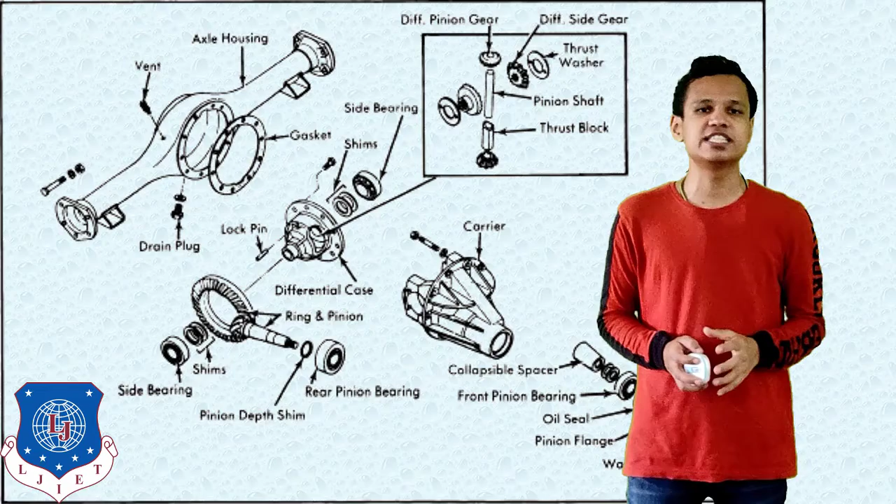Now in this case we will learn about the differential maintenance as well as the rear axle maintenance. So let's start with that. The first thing we need to look at is the exploded view of the rear axle whenever we are using the rear wheel drive with the front engine layout. Now in this figure you can see the rear axle has been dismantled and all the components from it have been kept in a disassembled view.

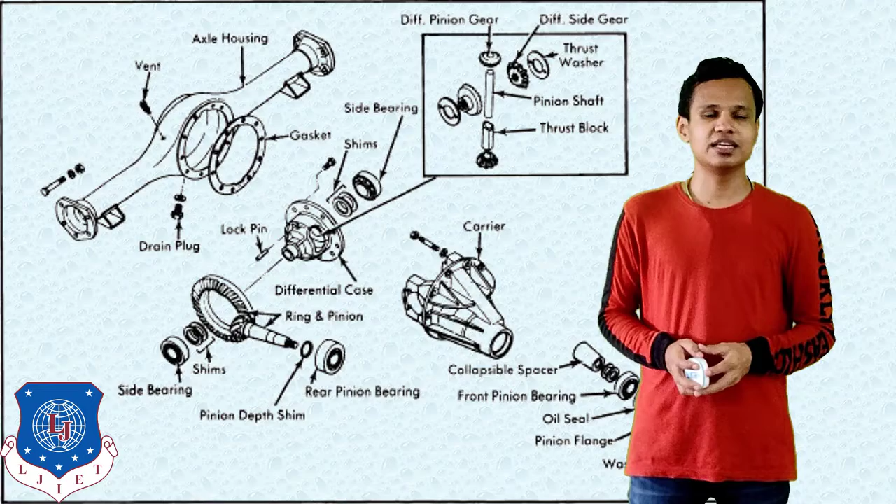You can see the gears of the differential, the 4 gears that are the spider gears of the differential. Also there will be a final drive which consists of the 2 gears. One is the ring gear and second is the pinion gear. The pinion gear transmits the power from the propeller shaft towards the ring gear, and the ring gear further rotates the gears of the differential, and the differential further transmits the power to the wheels and tires of the rear axle. The cover of the rear axle has been kept on differential and axle as well. The axle will be called the live axle in case of this design.

Now let's see some steps of the diagnosis for differential and rear axle. For that, the first thing is that the differential gears on the rear wheel drive will rarely wear out, because the torque transmission and the power on those gears are not as much as the gearbox, so there will be a lesser amount of wear in case of the gears of the differential.

Now damage to the gears can happen because of moisture or dirt if the cover is not properly insulated from the atmosphere, and if the driver is a rough driver or the differential is facing abuse from the driver. It means the driver is driving the vehicle very roughly, then it can also create problems to the gears of the differential as well. Also, sometimes the gear ratio gets changed from the normal position. The gear ratio which we require gets changed in case of the differential. And in that case, we will always have to disassemble the differential gears, and the gear ratio will have to be reset once again.

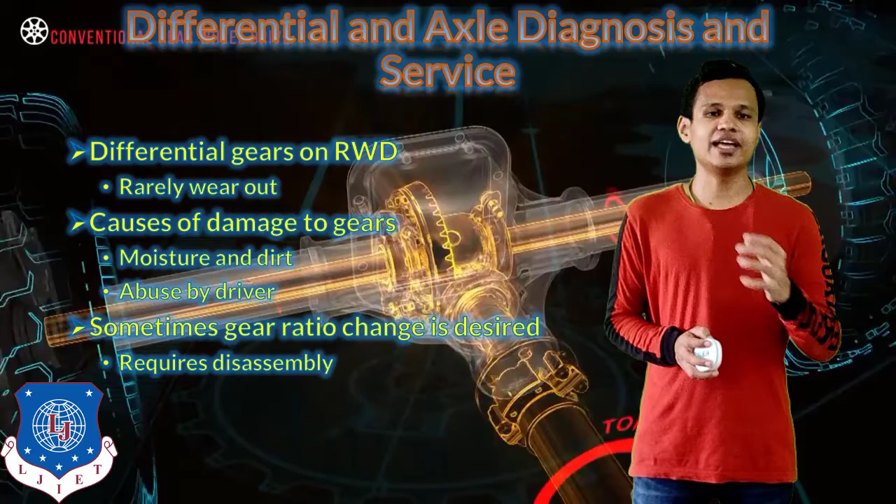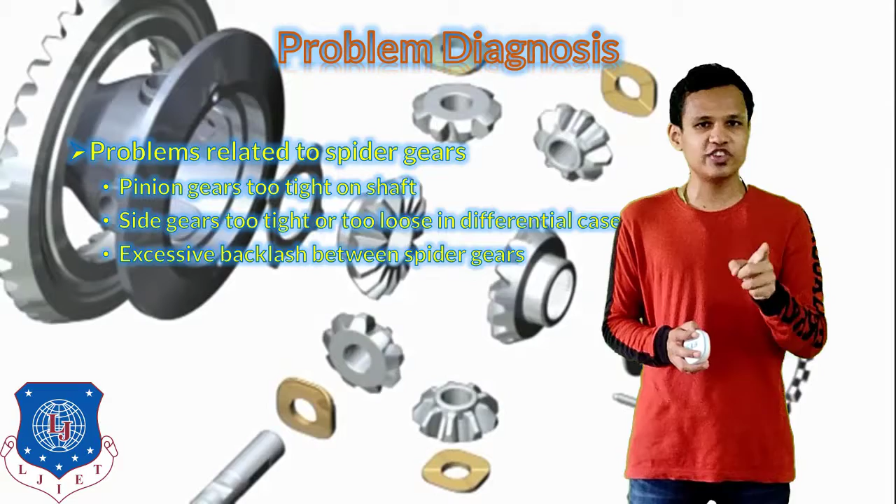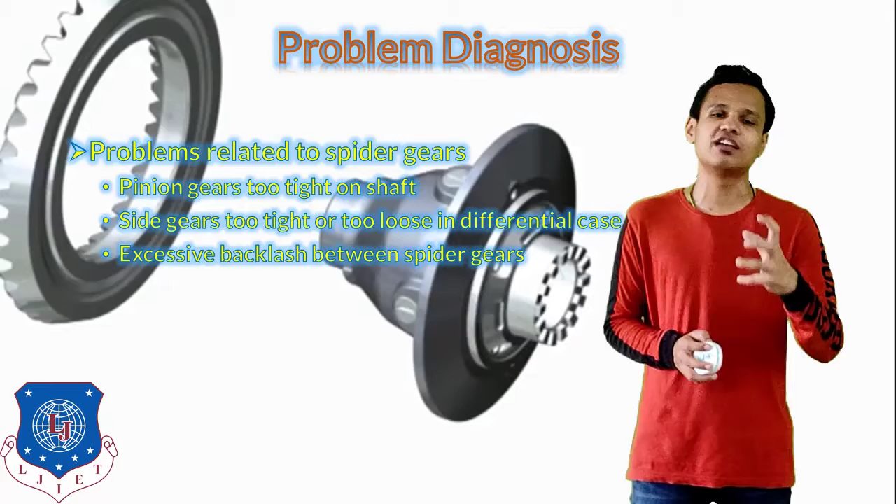Next thing is the diagnosis of the problems in case of the differentials. So problems related to the spider gears. Spider gears are the 4 gears which are given inside the differential. Problems can happen if the pinion gears are too tight on the shaft, or the side gears are too tight or too loose in the differential case, or excessive backlash has been provided between the spider gears. The detail about the backlash will be learned in the next video. We will see how to control the backlash, how to adjust the backlash, and what is the purpose of giving the backlash to the gears of the differential.

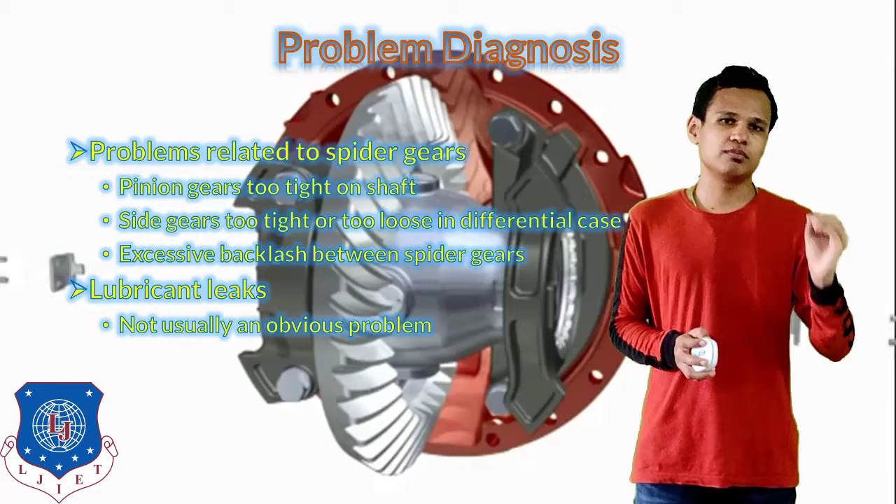And next thing is the lubricant leak. The lubricant will be filled in the differential case inside the rear axle housing, and that is generally not going to be any problem if there is no big leakage in case of the differential lubrication. Next thing is the diagnosis for the axle bearing. The axle bearing is the bearing which is connected at both ends of the axles and which will be further connected to the wheels. If the axle bearing has been damaged, then it can result in the fluid leak or the bearing noise. There is an important consideration to keep in mind whenever we are doing the axle bearing diagnosis.

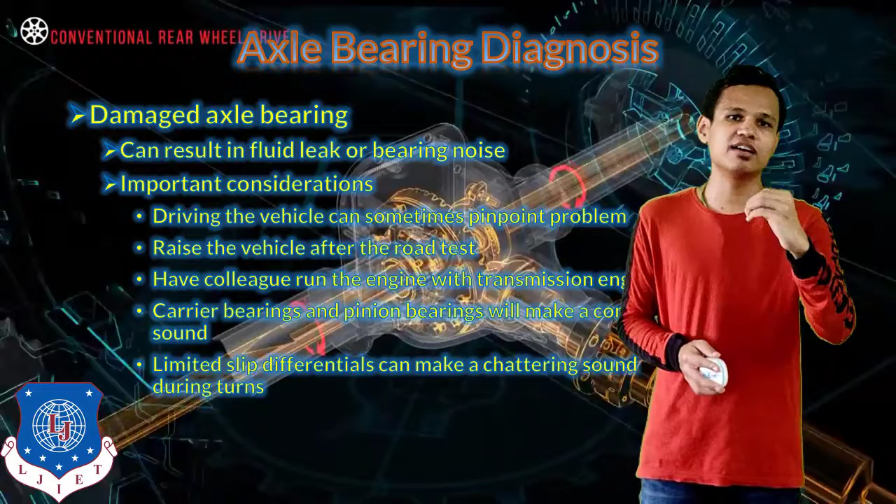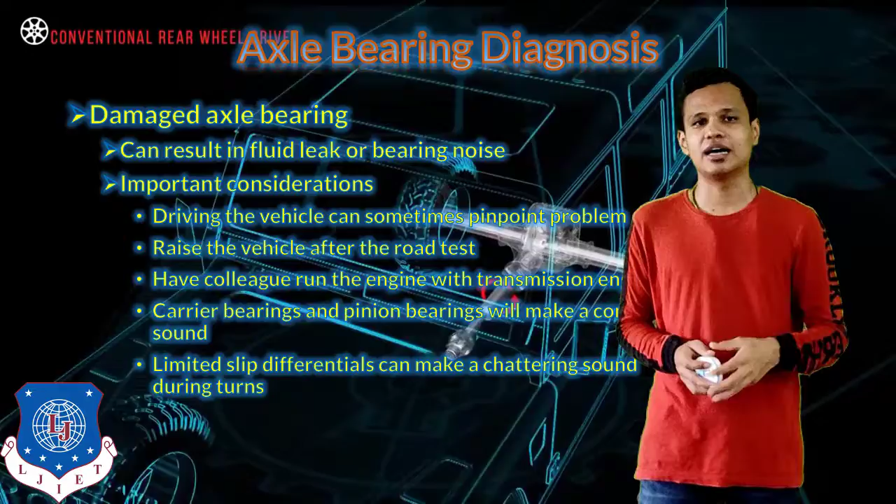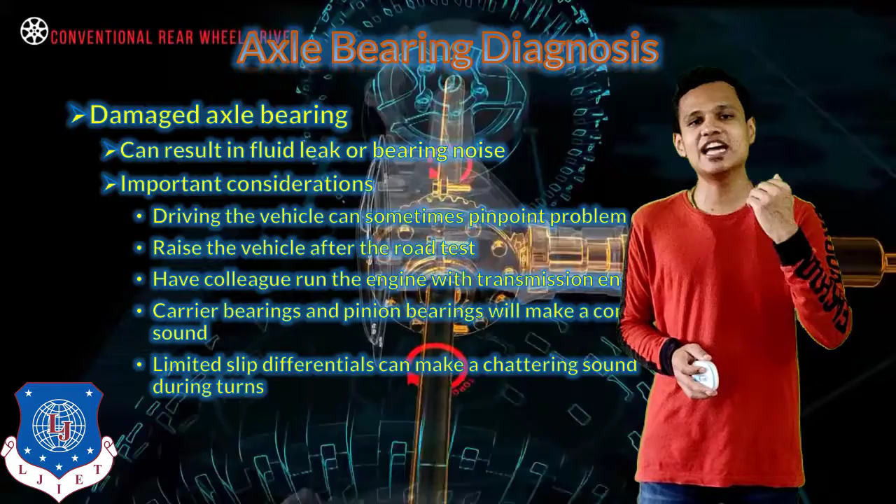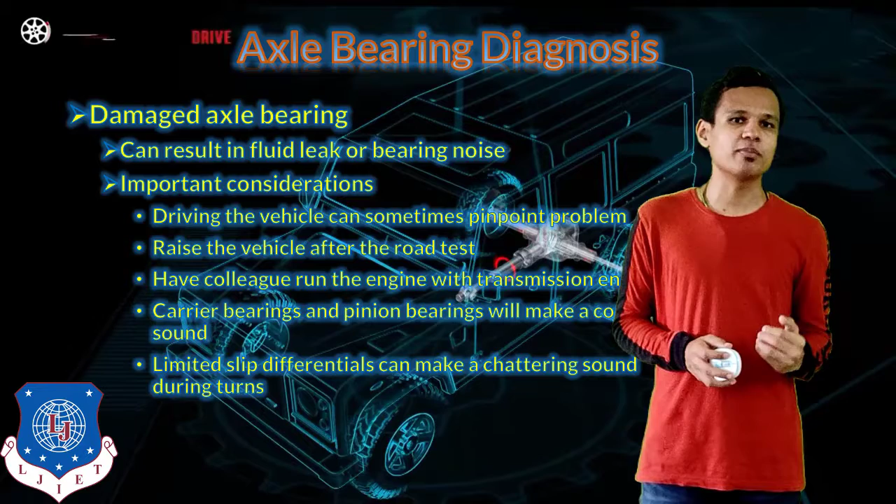We will drive the vehicle, which can give you the problem location or show you how the problem is occurring. We will raise the vehicle after the road test, and we will have a colleague run the engine while we are raising the vehicle. After we engage the transmission, if the carrier bearings and the pinion bearings are damaged, they will make a constant sound. The limited slip differential can make a chattering sound while taking turns. That is normal if we are using the limited slip differential.

The next thing is the axle bearing service. In case of the axle bearing service, the sealed rear axle bearing needs to be removed if there is any problem. There is no service interval. Axle removal is required, and press work is usually done by a parts business or the machine shop.

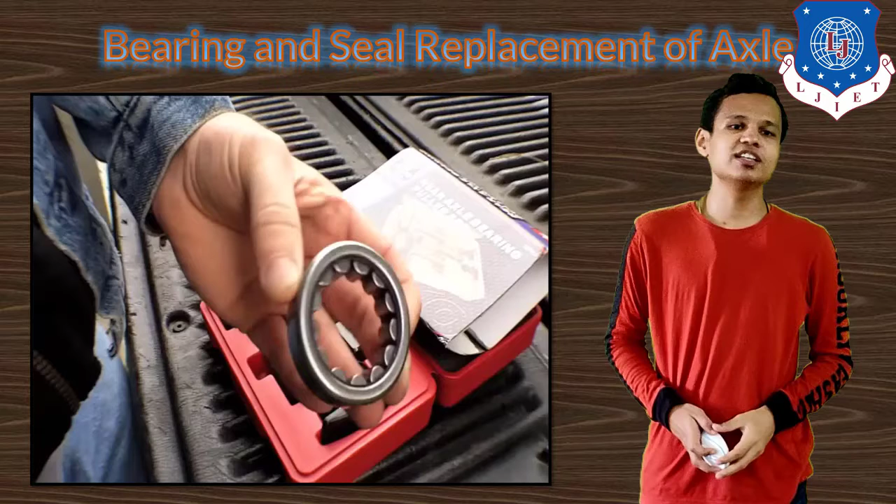Repair: how to repair the axle seal. That requires the removal of the axle from the differential. Only after that can we remove the axle seal. So now we will see the bearing and seal replacement of the axle, how to replace the bearing.

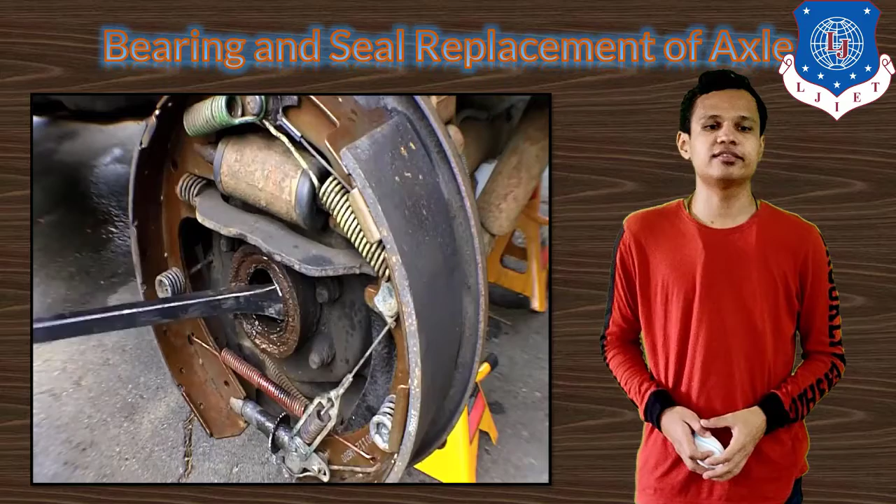So in this video you can see that the roller bearing which is used in the end of the axle will first be removed from inside the axles. To remove the axle, first the seal will be removed. What he is doing is removing the seal from the bearings. After removal, the seal will be kept aside, and after that the bearing can be removed with the help of a special bearing puller.

You can see that it is hard to remove the seal. This has been removed now. Now this type of puller will be required to remove the bearings. It will be inserted in there, then adjusted by opening its flanges, and it will be closed with the help of a nut. After closing, it will be pulled with a little force, one by one.

We will pull the bearing from it. Just by pulling, the bearing will come out with a number of pulls, and this is how the bearing will come out with the help of this special puller. Now we have to put the new bearing in place of the old bearing. We have removed the old bearing. Now we will put the new bearing in place of that old bearing.

So the next thing we need to do is insert the new bearing. This new bearing has been kept on the puller once again, and that puller will be entered inside the hole, and the bearing will be replaced by this simple method. You can see now that the bearing has been inserted, and it will be pushed continuously, same as the pulling. This time we are pushing the bearing inside, not pulling it.

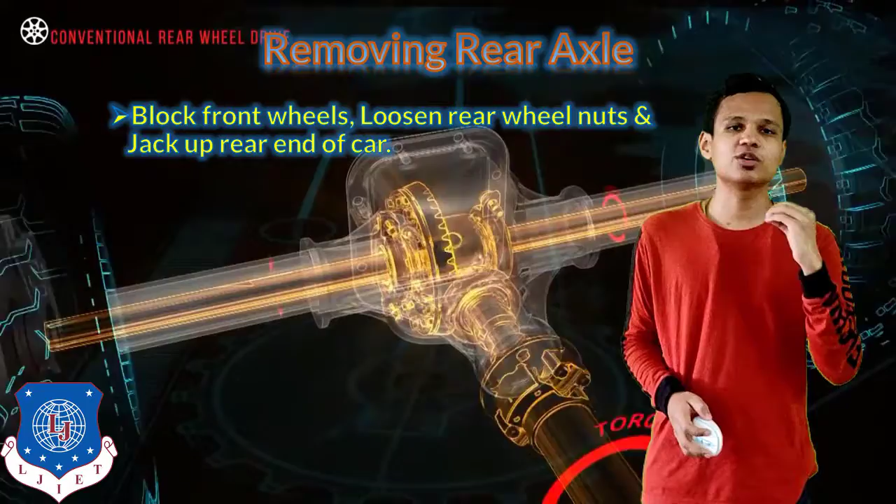Next thing is to remove the rear axle. How to remove the rear axle from the vehicle? For that, first we will block the front wheels, loosen the rear wheel nuts, and jack up the rear end of the car. We will put the screw jack at the rear of the car.

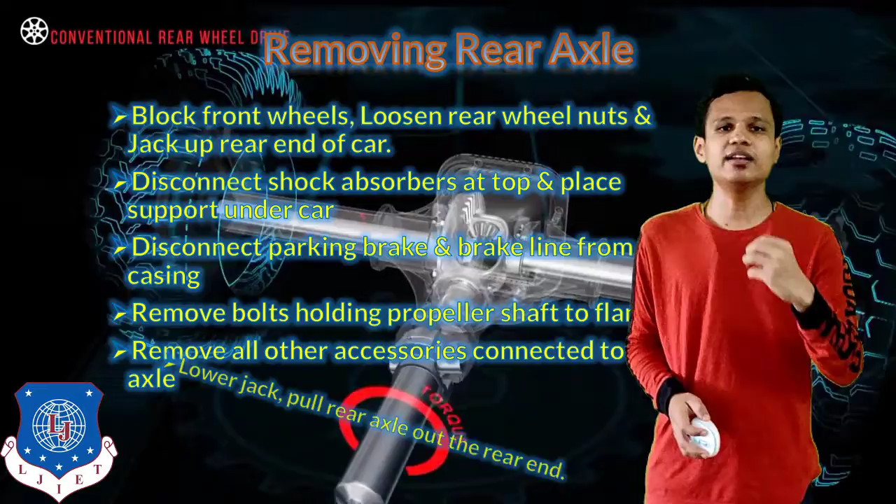After that, we will disconnect the shock absorber at the top and place support under the car. Then we will disconnect the parking brake and brake line from the axle casing, and remove the bolts holding the propeller shaft to the flange. After that, we will remove all the accessories connected to the rear axle, and after lowering the jack, we will pull the axle out of the rear end.

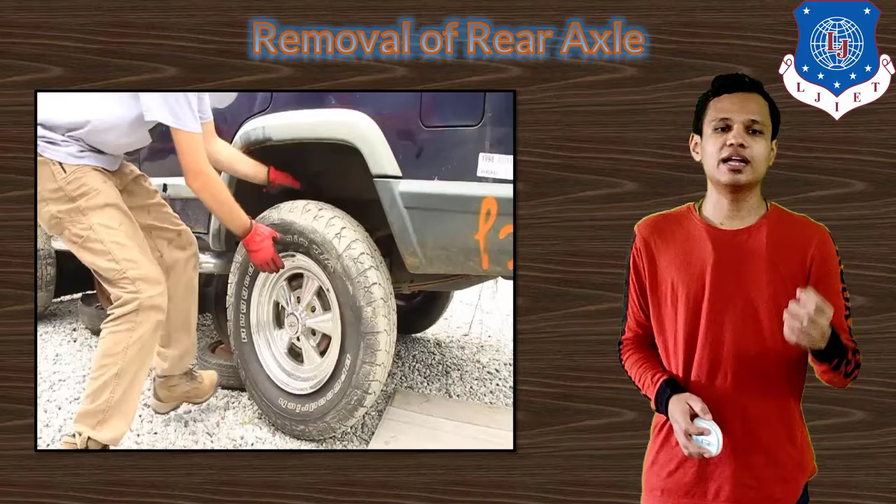So after removing all the components attached to the rear axle, we can easily remove the axle from the casing. This is how fast the wheel will come out, and all the components will be kept aside. The nuts have rusted, so we are applying oil on them so we can easily remove them whenever required.

Now he's removing the shock absorber; the strut of the shock absorber is being removed first. Next thing will be to remove the shock absorber. He is removing the shock absorber which is connected with the rear axle assembly. After that, the propeller shaft will be disconnected.

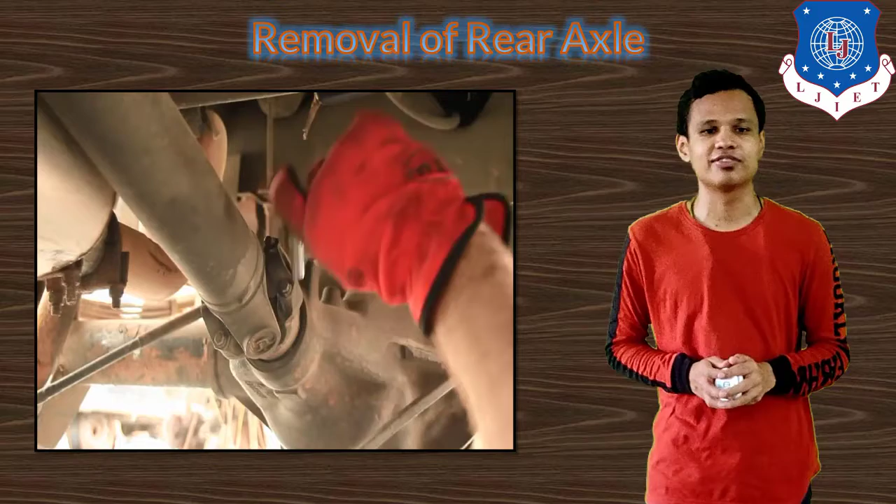Now what he is disconnecting is the propeller shaft, that is, the drive shaft. The flange end of the propeller shaft will be disconnected from the rear axle. Just removing the nut, we will easily remove the propeller shaft from the rear axle.

After removing the propeller shaft from the rear axle, next we need to remove the parking brake. What he is doing now is removing the parking brake lines. He will just cut the brakes and he will provide new brake lines.

Next he will cut the brake lines and provide new brake lines when the installation is done, which is an easier part compared to the whole process of removing the brakes.

Right, now the bolts will be opened, and after opening the bolts, the rear axle can be pulled out from the assembly. Right, so this is how the rear axle has been removed from the system. Next thing will be the removal of the differential from the rear axle housing.

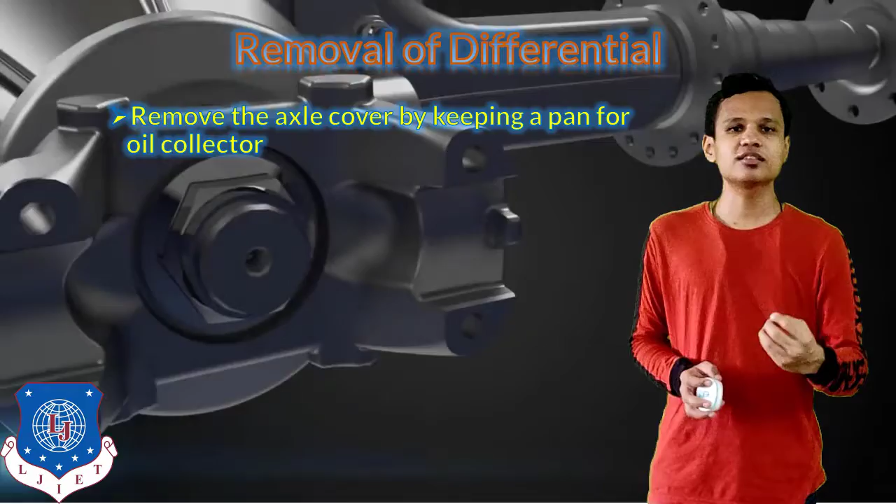Right, what we did is that we removed the rear axle. Now we need to remove the differential from it. So first we will have to remove the axle cover, keeping the pan for the oil collector. After that we will remove the flange that is connected to the bevel pinion. Then remove the cross pin which is attached to the carrier of the differential.

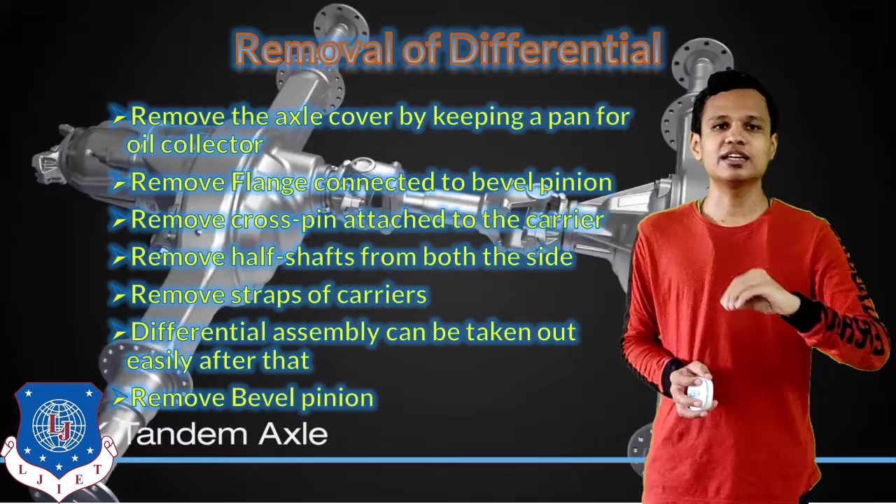After that we will remove the half shafts from both the sides. After, we will remove the straps of the carrier so that the gears can be removed. And after removing the straps, the differential assembly can be taken out simply by hand. At the last, we will remove the bevel pinion from the back of the axle housing. So let's see an example of how to remove the differential from the rear axle.

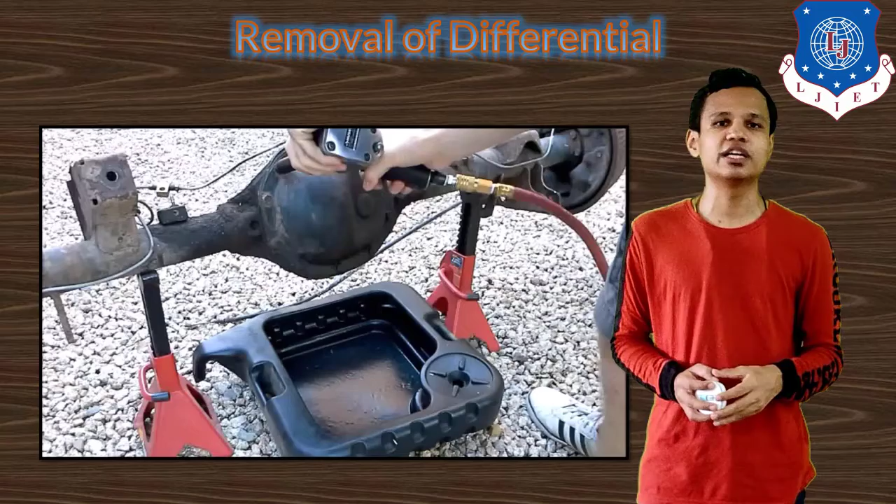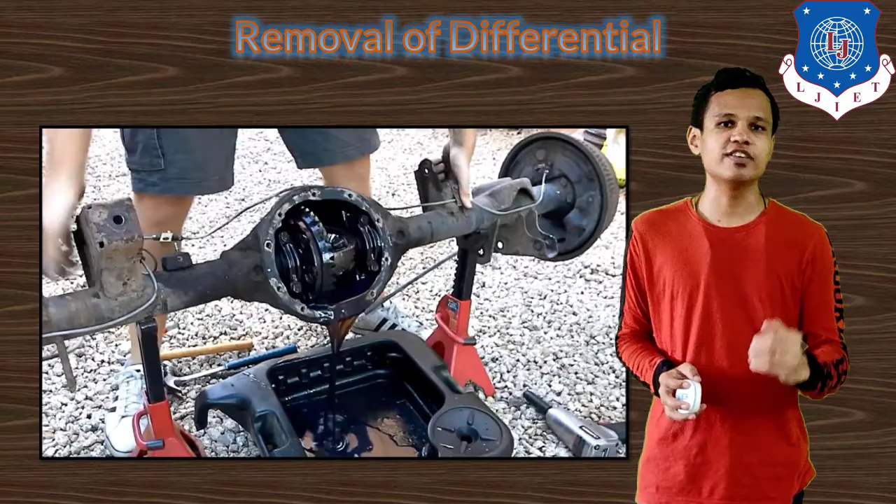First, the cover will be opened by removing all the nuts. Whenever we open the cover, the pan should be kept below the differential so that whenever the oil comes out of it, we can collect it in a container that can be used again whenever we are installing the differential. Right, so you can see now that after removal of the cover, the oil will be drained in a pan which is kept just for storing that oil which is used for the differential.

Next thing to do after removing the cover is to just remove the bevel pinion bolt from the bottom side. Right, you can now see the open differential which is being used with the rear axle. This is a simple open differential. You can see 4 gears with one big ring gear in that. The bevel pinion will be on the back side.

Now what we need to do is remove the cross pin. The cross pin will be removed by removing the bolt, and the cross pin can be removed from that. After the removal of the cross pin, the two shafts can be taken out. Right, generally you can see the cross pin can be removed just by hand force after removing the nut. So this is how the cross pin has been removed.

After removing the cross pin, now we can see that the two half shafts have been kept in place because they were attached with the help of two C-clips which were connected with the cross shaft. Now just by pushing from one end, we are removing those clips which were in place when we are removing the cross pin. So after removing those C-clips, we will easily be able to remove the two half shafts from both the ends.

He has removed the half shaft from one end. Right, this is how the shaft will look. The second shaft will be easily removed like this as well. Now you can see that the shafts were kept in place with the help of two C-clips. Right, this type of C-clip was used to keep the two half shafts in place whenever we were using the half shafts. So these two half shafts were connected with that.

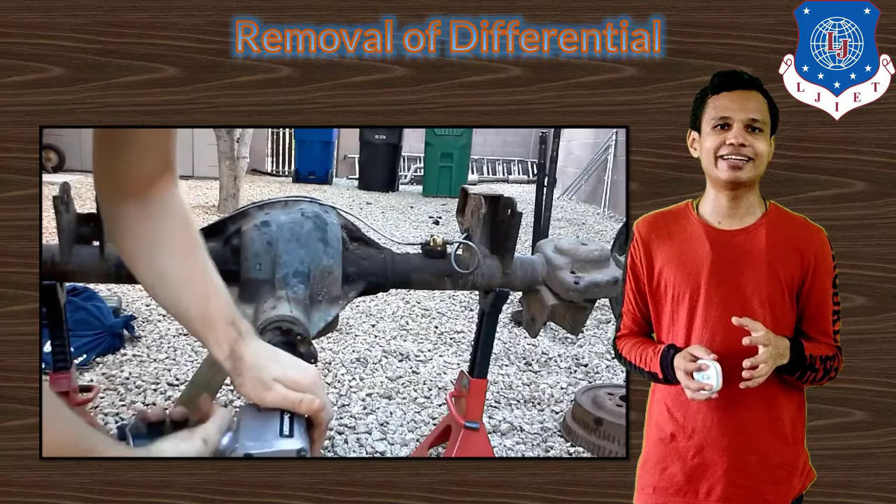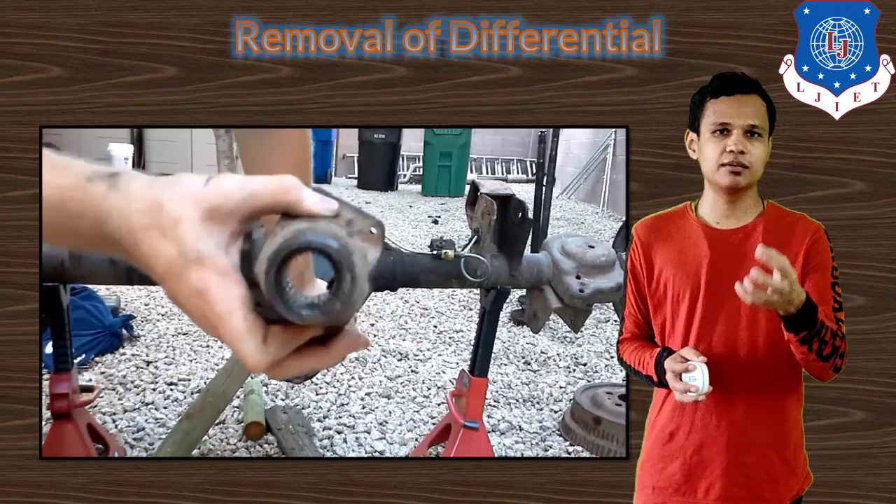Now the nut of the bevel pinion, which was at the end of the propeller shaft, will be removed, and that bevel pinion will be removed by removing the nut. The bevel pinion gets rotated whenever we are removing the nut. We will have to apply an extra force with the help of a hammer, and the bevel pinion cover or the yoke end of the propeller shaft is removed after that.

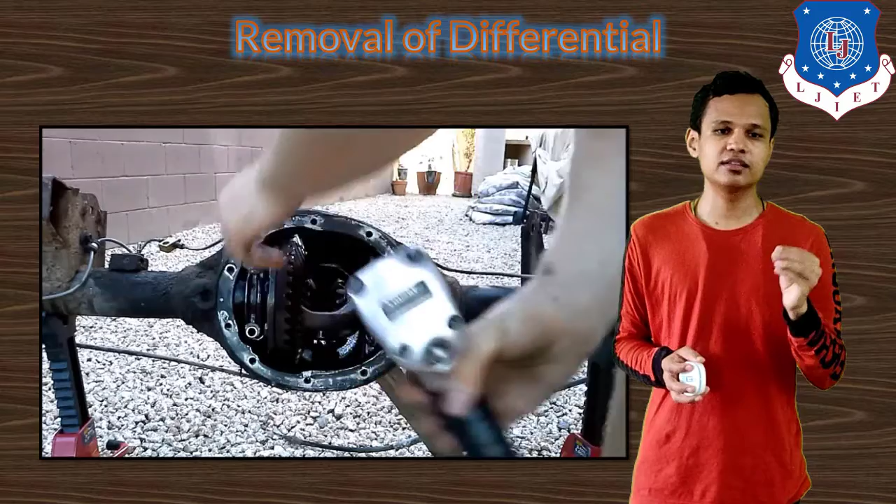After that, we need to remove the cages or the straps which are connected to our gears. Right, the carrier straps will be removed. This is how the two straps will come out from the system. Just by removing the straps, now the differential assembly can be easily taken out by simple hand pulling. Right, you can see now that he has just removed the differential assembly.

You can now see inside the bevel pinion gear, which is connected to our ring gear. That bevel pinion gear will be pushed out from the backward side and detached from the system. That can easily be done with a little force of the hammer, and that bevel pinion will be removed by just the force of that hammer. So this is how the whole differential can be disassembled with a simple procedure.

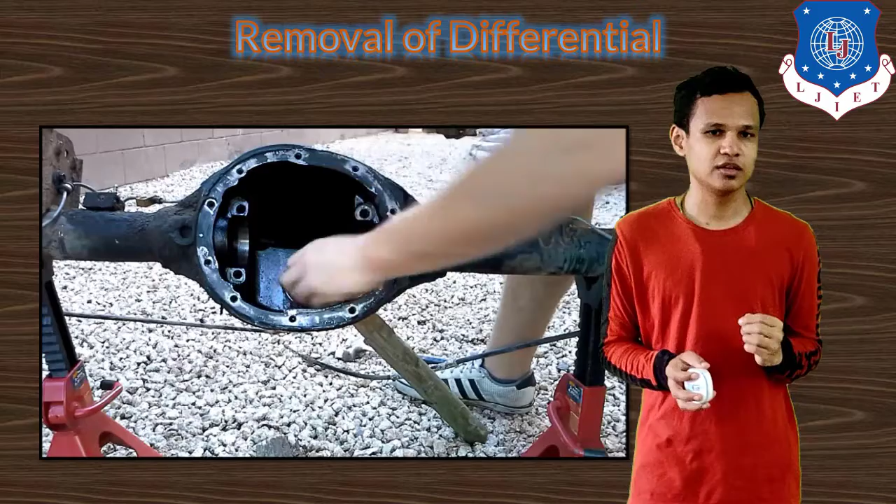So in this video we saw the removal of the rear axle and the removal of the differential. In the next video we will see the disassembly of the differential, and then the assembly of the differential and then the rear axle. Also we will learn about the backlash in the differential.